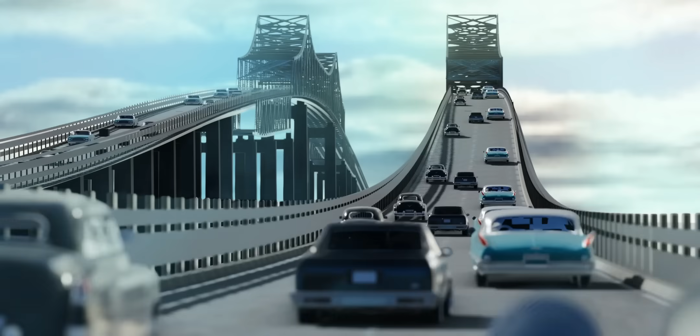A journey over the beautiful and curvy Sunshine Skyway Bridge was any motorist's dream. However, on May 9, 1980, early morning, a strange sequence of collapses, and what the car passengers experienced was... Rewind just 10 minutes back. This ship, which is approaching the bridge, is supposed to pass between the main piers. Unfortunately,

what will happen if this pier is not present? Obviously, this junction has to go down. What happens afterward? Look at the strong hinges at the other end. Can they resist the bridge failure? The biggest surprise is in this photograph. You can see both the columns are collapsed, but the base structure is intact. How can a ship collision damage both the columns without damaging the base?

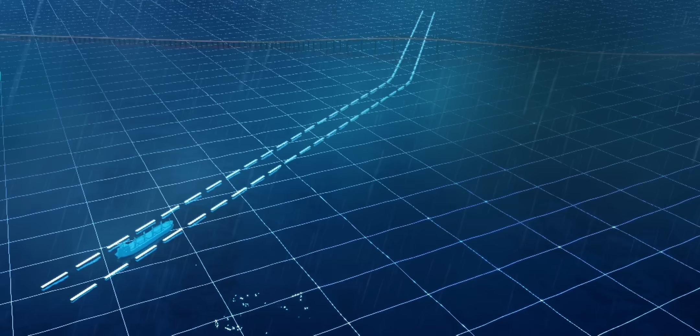The answer lies in the way the captain navigated the ship. These buoys are crucial for the captain. Navigating the ship under the bridge was a difficult task, and still is. Look at the sharp turn the captain had to take. The most crucial buoys in this whole task are 1A and 2A. The captain is all prepared to navigate the ship from Mullet Key Channel to Cut A Channel. But a sudden burst of rain and wind caused the captain to lose visual on these two most crucial buoys.

The ship was still on radar. Unfortunately, the wind strength increased further, and the ship disappeared from radar too. This is something every sailor is terrified of. A microburst of adverse effects at the most crucial moment. He even ordered the ship's mate to be ready to drop anchors. The captain was obviously making clever decisions at this time. The captain's only hope was the lookout at the starboard side.

The lookout reported a sighting of a buoy to the captain, but with no details of angle or distance. The lookout had a brief sighting of buoy 2A, and this was the position of the ship at that moment. The ship is outside the Mullet Key Channel. With no information of angle and distance, what the captain perceived was this position. Ship's bow 15 meters from buoy and perfectly inside the Mullet Key Channel. Based on this perception, the captain decided to turn the ship. At 7:31 a.m., he even reduced the engine speed further.

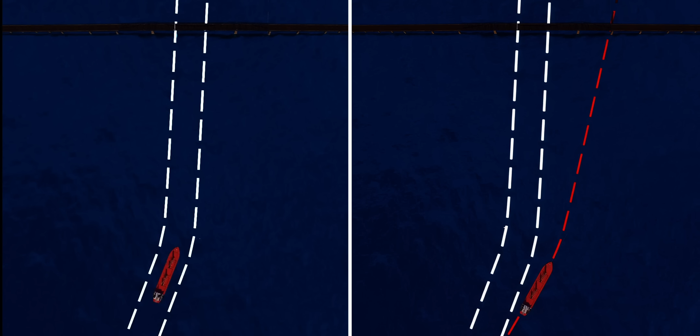Please pause the video here to analyze these two situations. If the presumed position of the ship was correct, this is the effect of the ship's turning. In reality, the starting position was totally different, and most importantly, the ship was at an angle. You know what will happen if the ship is angled. It will change the course of travel completely. You can even notice the captain took the right amount of turn. Due to the wrong starting, the ship was at an offset from the channel. This offset kept on increasing as the ship approached the bridge.

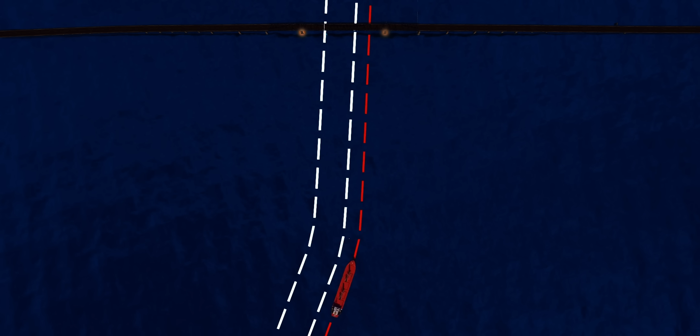Now, let's pause the video here and analyze an imaginary condition. What if the ship was straight at the beginning? To answer this, you just need to rotate the ship path like this. Wow, the ship is perfectly between the main piers of the bridge. Anyway, this didn't happen, and at roughly one ship length away, the crew was terrified to see a bridge pier in front of the ship.

It was too late. The captain immediately ordered full power and reverse of the engine. The anchors were also quickly released and began dragging the ship in the shallow water. The ship's speed was slightly reduced. A ship with such a huge momentum cannot be stopped easily. At 7:34 a.m., the ship rammed into one of the main piers of the bridge. To understand the nature of this impact, let's rewind this crash in the top view.

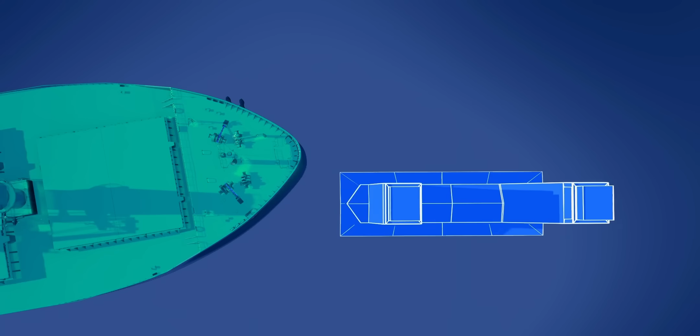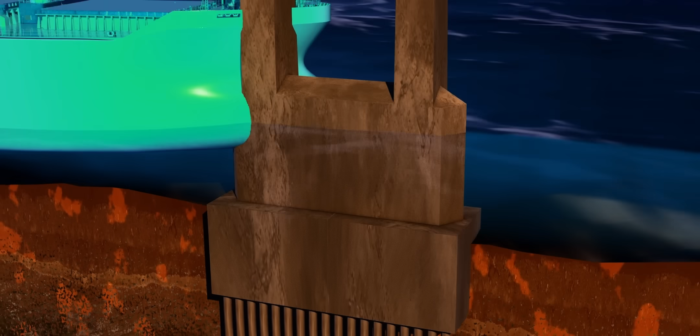It was not a head-on collision. The ship was angled, and the ship's starboard side hit column 1 of the pier. The starboard side of the ship had a huge impact with the protection barrier. This portion, being too strong, didn't move or develop any crack. Look at the geometry of the bridge pier. It is rugged. First, a protection barrier. After that, piles traveling through the ocean bed until they reach the hard strata.

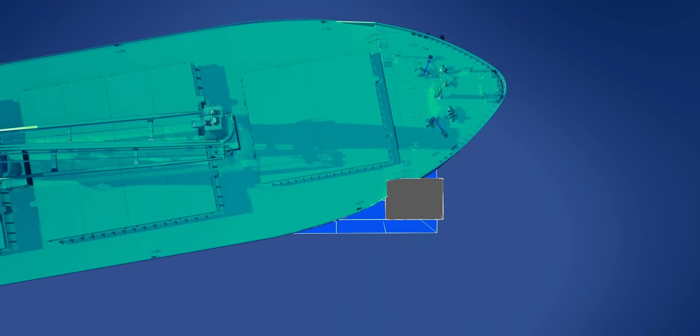The strong protection barrier deformed the ship's body, and with a reduced speed, it moved forward and hit column 2 as well. Eventually, column 2 as well was destroyed. With this hit, the ship lost all momentum and came to a rest. If it were a head-on collision, what would have happened? We already know about the strength of the protection barrier. In this case, the first column would definitely collapse.

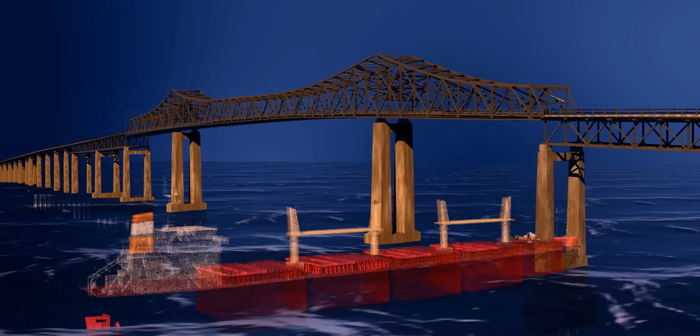Most importantly, the ship's front region would have suffered heavy damage, possibly cracks and water leakage too, but there was no way the ship would hit the second column. Even though slightly twisted, the bridge would have stayed upright and a tragedy could have been avoided. Unfortunately, the pier the ship destroyed was an important structural element of the cantilever bridge known as the anchor pier.

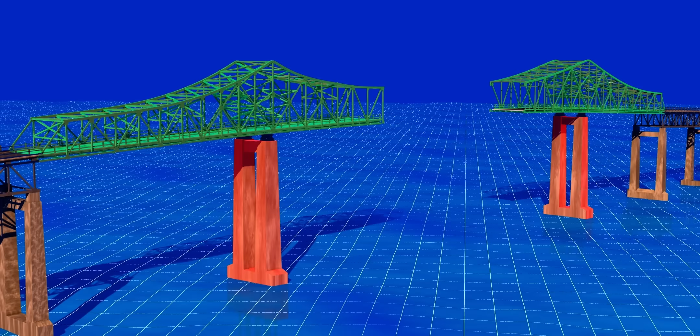The cantilever bridge has an interesting science behind it. The bearings on the main piers are crucial. If you observe an image of a cantilever bridge during construction, you can see two cantilevers approaching each other. These are the main piers of the bridge. These cantilevers are not permanently fixed with the main pier. Instead, they are connected with the main pier via a rocker bearing.

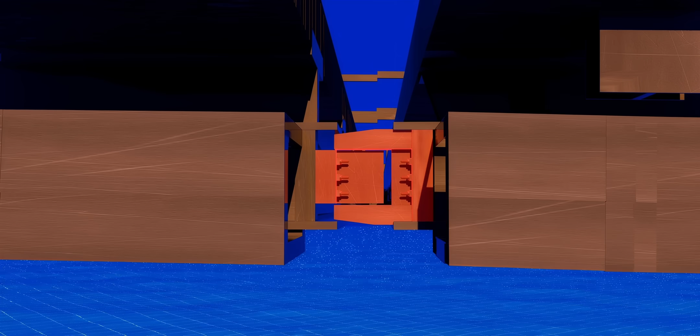This structure is obviously not stable. What makes them stable is the connection between the cantilever sections, the suspended span. The connection here is interesting. It's a type of hinge that allows for slight bending of the bridge while maintaining the stability of the bridge. The gap caused by this connection is filled with finger expansion joints.

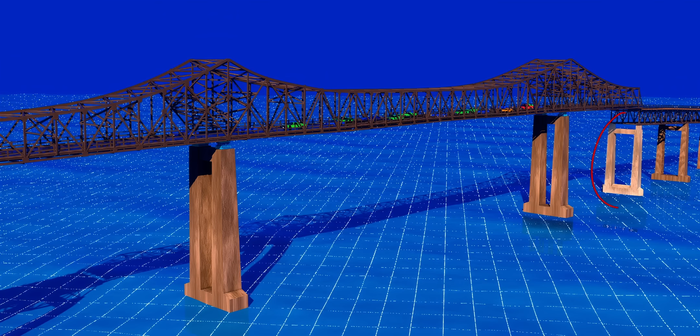When a vehicle weight acts on this bridge, the bridge will flex slightly down. You may observe the role of rocker bearings and hinges during this flex. The big question is, what will happen to this bridge without the support from this pier? To understand this, I would like to introduce you to professional-grade mechanical design software.

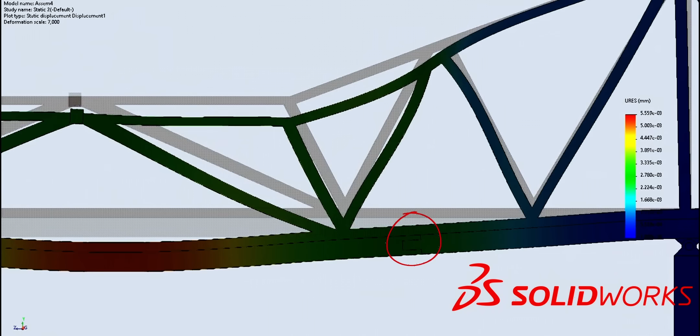It is obvious that without the support of the pier, the bridge will bend as shown. What about the hinges on the other side? The SolidWorks simulation predicts that the hinge will go up. It's counterintuitive, right? Due to the lost support, the hinge wants to move up. The question is, can the hinges resist this upward motion?

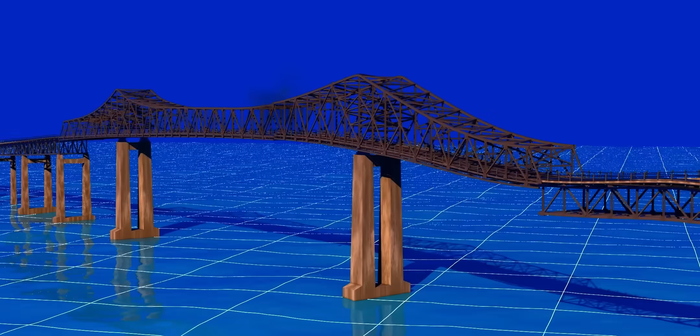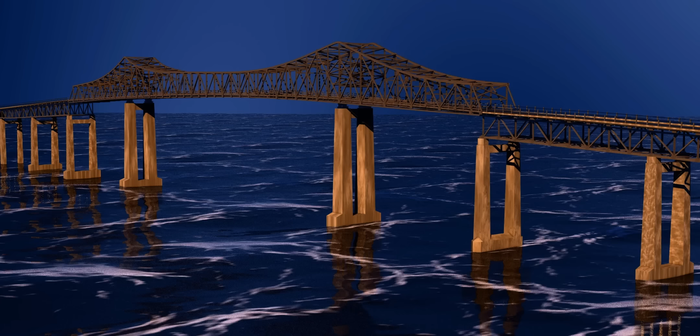No. The load the hinges had to carry was tremendous, and the hinges broke. This portion of the bridge disappeared into the water. Without the support of the right portion, a cantilever bridge is not stable. The left portion of the bridge also collapsed eventually. The Sunshine Skyway Bridge was in fact a pair of parallel bridges. The ship didn't hit the other bridge, and it remained intact.

The first vehicle to fall into the water was the 1974 blue Ford Courier pickup truck driven by Wesley MacIntire. When he was in the middle of the bridge, he felt the pickup start to bob up and down. While the pickup was in the descending phase of the bridge, the roadway effectively vanished beneath him. His truck fell approximately 46 meters. Immediately after MacIntire's truck fell, the other vehicles followed.

The next was a Greyhound bus. Because of the blinding rain, the driver could not see that the bridge was gone until it was too late. 5 other cars followed, essentially driving into a hole in the storm. The famous yellow Buick Skylark driven by Richard Hornbuckle was next in line. He managed to slam on the brakes and skidded to a stop just 14 inches from the jagged edge.

The collapse resulted in the deaths of 35 people. Only one person survived the fall from the bridge, the driver of the first car, which fell into the ocean. After the 150-foot fall, his truck struck the hull of the MV Summit Venture before sinking into the water. He managed to crawl out of his window and was pulled from the water by the ship's crew.

The story of Captain John Lerro, the harbor pilot at the helm of the MV Summit Venture during the 1980 Sunshine Skyway Bridge collapse, is often described by historians as a collision of guilt. Immediately following the disaster on May 9, 1980, Lerro faced intense public scrutiny and the suspension of his pilot license. However, the legal outcomes were in his favor. After a 2-week trial, a judge ruled that Lerro was not negligent.

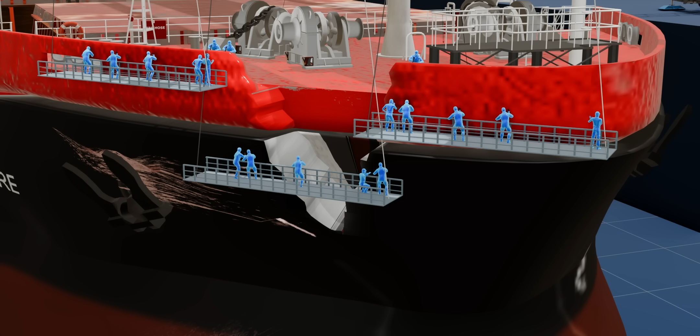The MV Summit Venture actually suffered minor damage compared to the catastrophic destruction it caused to the bridge. The ship was repaired shortly after the accident. While the bridge was estimated at $30 million at the time, the repairs for the Summit Venture cost approximately $1 million. The work primarily involved patching and reinforcing the crumpled steel on the bow. They also had to repair anchor systems that were deployed and damaged during the desperate attempt to stop the ship.

The ship returned to service later in 1980 and continued to operate under its original name, MV Summit Venture, for over a decade. In fact, with a change of ownership and name, the ship continued its service for 30 more years. On November 9, 2010, while sailing off the coast of Vietnam, it began taking on water and sank. Fortunately, all 26 crew members were rescued.

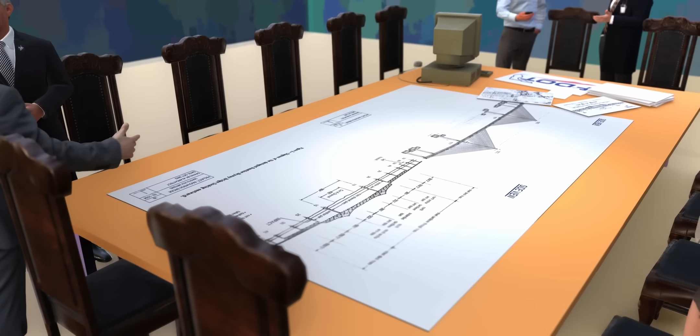The collapse of the Sunshine Skyway Bridge was a watershed moment in civil engineering, leading to a complete overhaul of how bridges are designed to withstand ship impacts. When they inaugurated the new bridge in 1987, the authorities and engineers applied several critical lessons. The original Sunshine Skyway Bridge was the vital connecting link between St. Petersburg and Terra Ceia in Florida, with a total length of 6.7 kilometers.

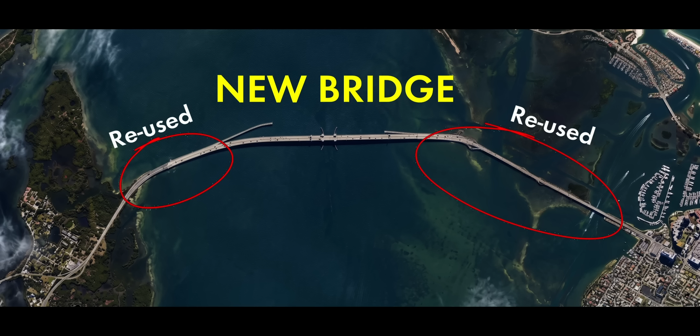This image illustrates the position of the new bridge. Note that they didn't have to demolish the entire old bridge for the construction of the new bridge. This portion of the approach ramp became a part of the new bridge. The most significant lesson while constructing the new bridge was that a bridge's support piers must be physically isolated from ship traffic. In 1980, there was nothing between the ship and the bridge pier.

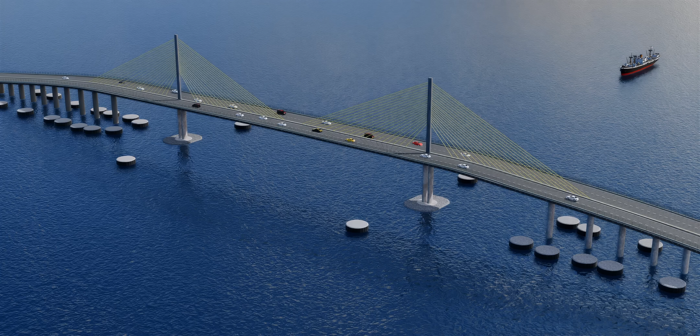Engineers surrounded the new bridge's main piers with 36 massive concrete dolphins. These are circular, rock-filled structures that act as bumpers. If a ship veers off course today, it will strike a sacrificial stone and concrete dolphin, grounding the ship long before it can touch the bridge itself.

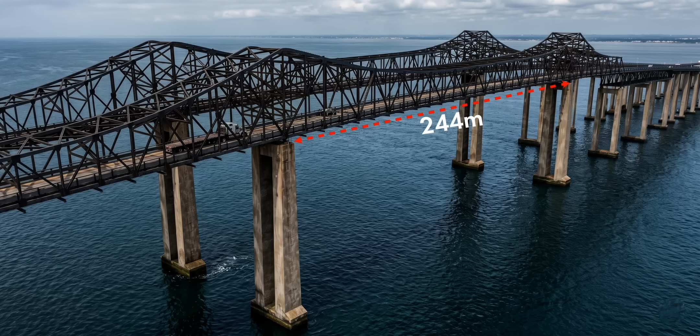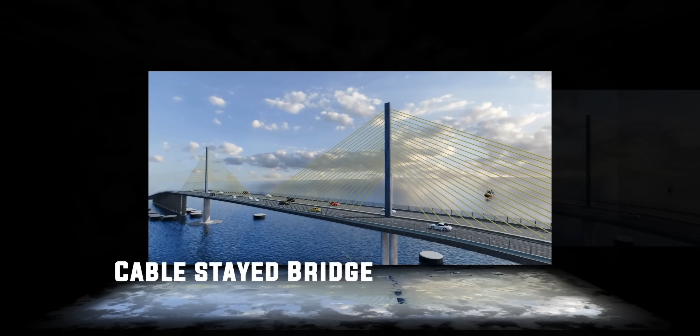The original bridge had a relatively narrow opening for ships. It was 244 meters, which left very little margin for error. For the new bridge, this clearance is 366 meters. Engineers moved away from the old cantilever steel truss to a cable-stayed bridge. The cantilever bridge works on balance. When one major piece was hit, a large section of the roadway became unstable and fell. Cable-stayed bridges have high redundancy.

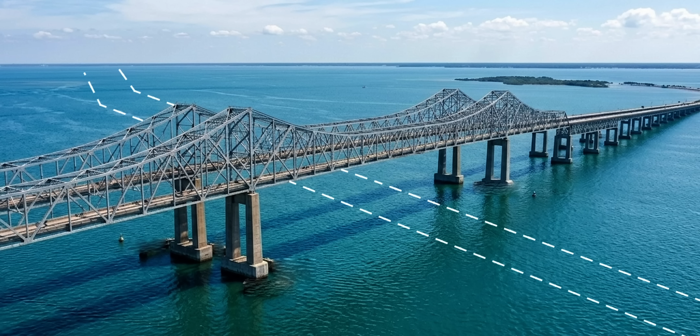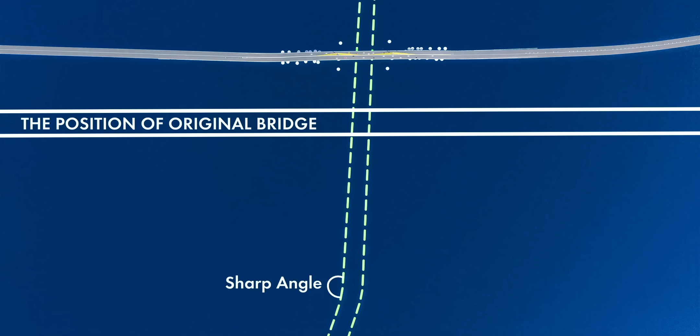Moreover, the old bridge was located in a spot where the shipping channel took a difficult turn. The new bridge was built about half a mile east of the original site. This repositioning allowed the shipping channel to be straightened, reducing the number of complex maneuvers a pilot has to make while passing under the span.

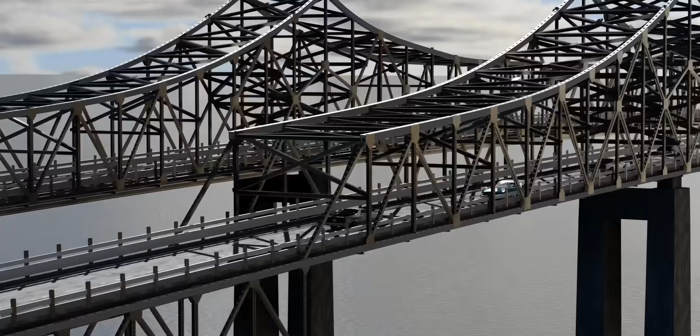The original Sunshine Skyway Bridge was a beloved icon of Florida's mid-century growth. The bridge had a very abrupt, steep incline that peaked at 46 meters. On clear days, tourists and thrill seekers loved the ascent. For daily commuters, the steepness created an optical illusion where the road seemed to disappear into the sky, making it feel like you were driving off a cliff until you reached the crest. The bridge offered a spectacular view from its very top.